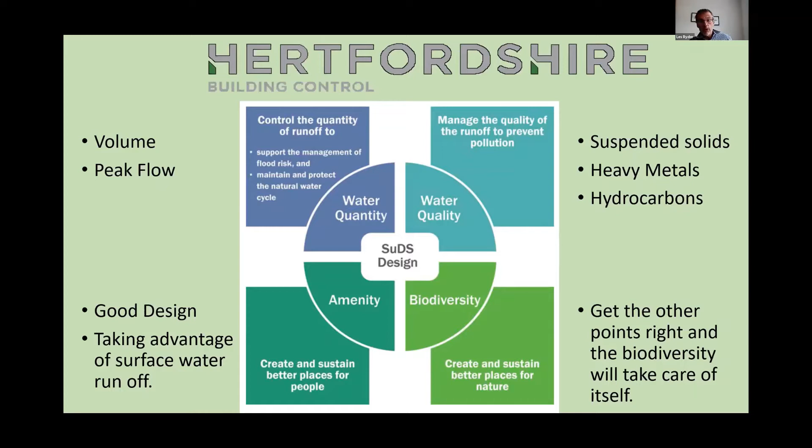What I was going to do to start off with was try and give a guidance to the legislation. And although SuDS is considered more for the big schemes, we've been adopting SuDS for a million years now. A soakaway is SuDS. It's an infiltration device, and requirement H3 of the building regulations is very clear about the way that we get rid of surface water.

It's got a hierarchy just the same as the SuDS manual does, where we look first to infiltrate, then secondly into a water course or a water body, and third into a sewer, but it doesn't identify any sewer, just says a sewer. The SuDS manual is a little bit more detailed, but it's along the same lines.

Wales has also added to that list collection for use, because infiltration can sometimes be difficult in Wales, because your site may be on bedrock, and it's very difficult to infiltrate into that. So we try and use it where we can, i.e. with rainwater harvesting. And then we have infiltration, surface water body, surface water sewer, combined sewer. So the legislation from the building regs is the same as the non-statutory guidance of the SuDS manual.

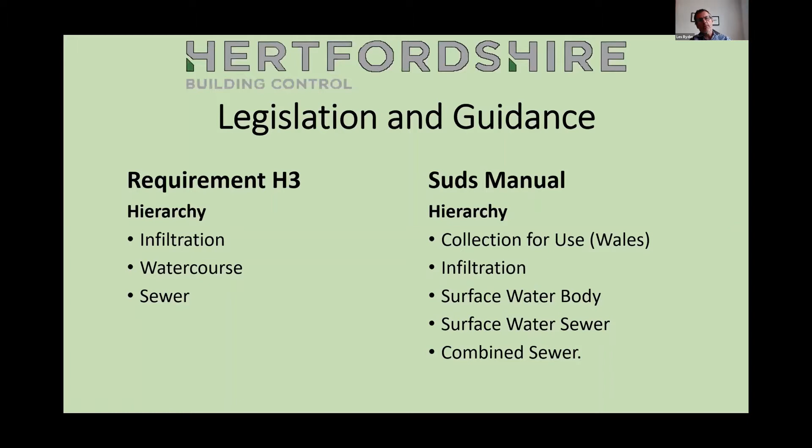So let's try and combine them together and give you guys some kind of idea of when you're going to be using soakaways and infiltration devices for the building regs, and when it's going to kick in and you're going to need to use SuDS as part of the planning process.

So up to 25 square meters of roof area, we're looking at a soakaway, and the design is 10 millimeters of rainfall in 5 minutes. So it's quite an intense event that soakaways for up to 25 square meters are recommended to be designed for. So don't be surprised if they overflow. They're almost designed to fail.

So when people turn around to me and say, well, I don't want to use the soakaway because it won't work in this soil, I say, well, they're not designed to work all the time. A 10 millimeter rainfall for 5 minutes is probably once every 6 months. So if it doesn't fail once every 6 months, it's doing extremely well.

Now, if you're between 25 square meters and 100 square meters, then you're looking for a rectangular soakaway in accordance with BRE 365, and you're looking at a 10-year return period to design it to, with a number of durations of storm events. So you're looking at an event that has a 10% chance of happening every year. So it's not as if that storm's only going to happen once in 10 years. It stands a chance of happening 10% of the time in any year. So again, it stands a chance of overflowing if it's designed onto the limit.

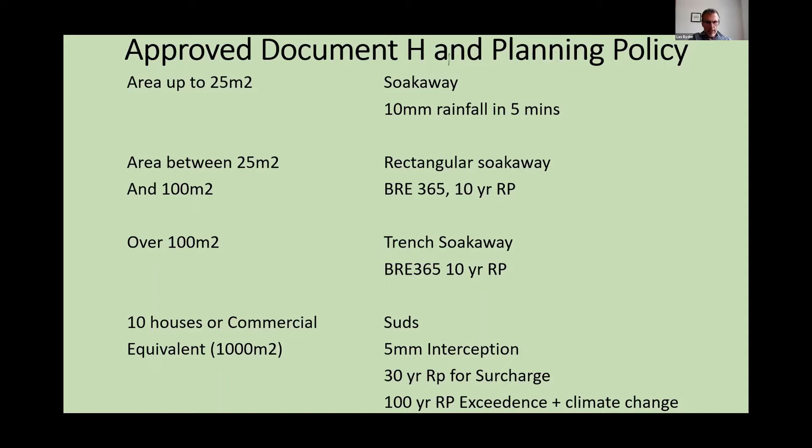And you'll see occasionally on developments curbs where curbs shouldn't be there. And the reason for that is it's directing the exceedance to where it's designed to be directed. So that's the reason for the curbs sometimes, obviously not always the case.

A little bit of a chat on soakaways. Regardless of the size, the benefits and the disadvantages are the same. It's an infiltration component, it's a storage component, and it provides some treatment in relation to quality. And it acts the same way as a big attenuation tank, exactly the same if you think about it. You can have large quantities of water coming into it, but there's only small quantities of water that's going to go out of it.

So the whole SuDS thing is based upon a soakaway, basically. Even though HR Wallingford would clip me around the ear for saying such a thing, because there's much more involved in it than that. In relation to the design, this depends upon the inflow and the subsoil. So the storage equals the inflow minus the infiltration.

So if you've got 10 litres per second coming in, and you've got 1 litre per second going out, then you've got to store 9 litres per second for the duration of the storm. It's really as simple as that. The other aspect of it: it should half empty within a reasonable period of time to deal with the next event. That makes sense. The thing fills up because it's dealing with an extreme event. If something else happens, it's going to fail almost instantly. So there's a bit of common sense involved in that.

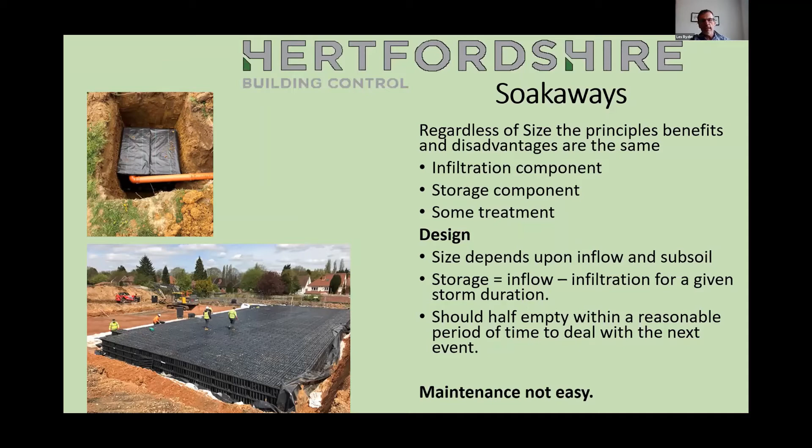This had me rolling around on the floor this morning. It was sent to me for comment. That's supposed to be a soakaway, and instead of wrapping it in geotextile membrane, they wrapped it in polythene and effectively made, I don't know, an underground pond, I suppose, because it's got no outlet. So things do go wrong occasionally, and that's basically something that went wrong.

I blacked the guy out in the photograph, so just in case anybody thought it was his fault, and I'm sure it was.

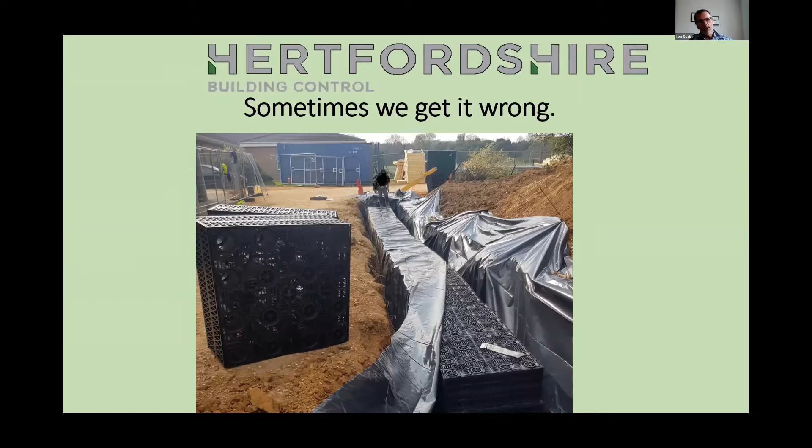Right, okay, a little bit more about soakaway design. Soakaways are designed to BRE 365. Now, all the data relating to rainfall characteristics in this country are based upon a 5-year return period storm with a 60-minute event. And that, for all of the country, is 20 millimetres. So that's 20 millimetres of rain all throughout the country. It doesn't alter.

Now, as per usual, what's happened is we're doing SuDS, and of course the rainfall characteristics are calculated completely differently. No reason for this. You either calculate soakaways in accordance with the index flood, or you calculate SuDS in accordance with the M5-60 data. But no, we've got two ways of doing it.

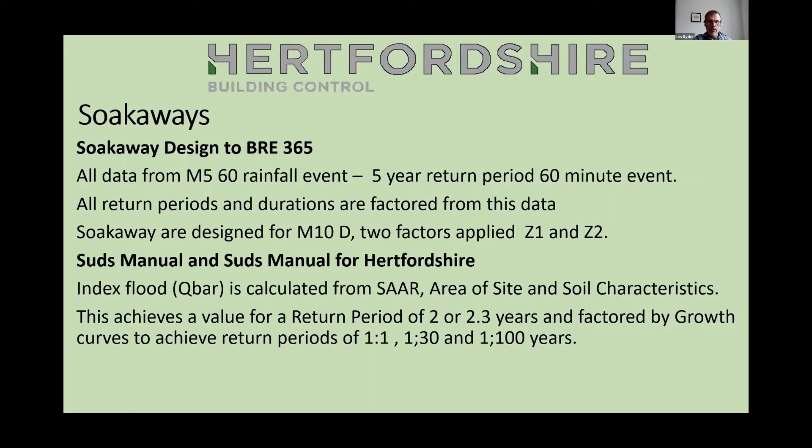What is it trying to achieve? Well, it's trying to mimic the surface water runoff of a greenfield site. And basically, how does that happen? It happens through infiltration, through both deep and shallow infiltration. Now, we've got 2 types of infiltration. They depend upon the soil. If the soil is permeable, then the infiltration can go deep, and that will recharge the water table, to potentially create the base flow for the rivers.

And the shallow infiltration is if we've got an impermeable solid geology, and basically what happens then is the water will permeate, the topsoil will be permeable to a certain extent, and then it will start heading towards the watercourse, or some kind of ponded retention because of the topography of the area.

The other way the greenfield site will lose water is through evaporation, either direct to the atmosphere or through vegetation, which is transpiration. Now, the SuDS people have invented a new word called evapotranspiration, and I won't even write it down.

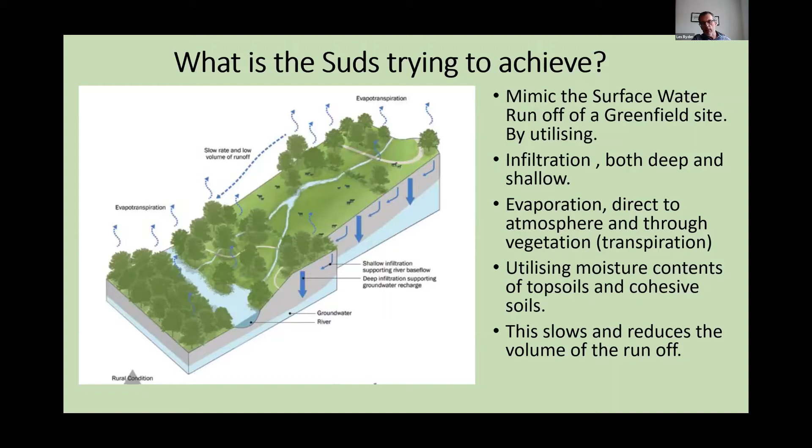So what are the factors that vary the runoff? Like I said, the degree of vegetation, depth of the topsoil, type of the subsoil, and of course the rainfall characteristics. If it doesn't rain, we don't have any runoff. It really is as simple as that. But we don't have that facility in the country, as you're probably well aware.

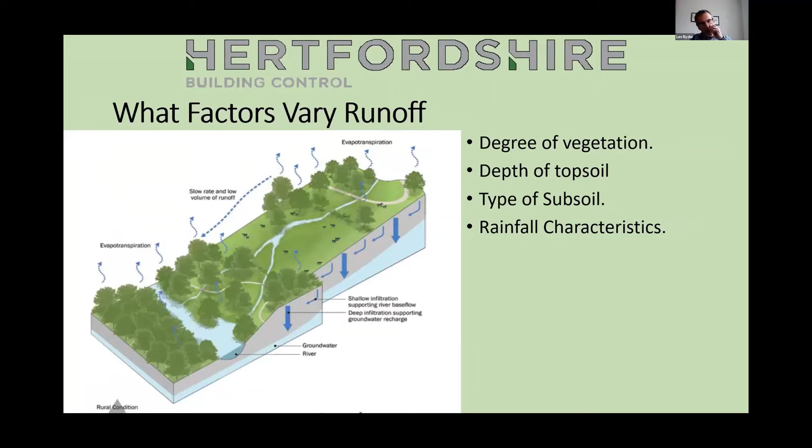So here we come onto the developed side, which is causing us all the problems. Well, it's not causing us all the problems, because some of the flooding problems are natural floodplains, but a lot of the flooding problems are created by development. So what's the problem? The problem is we have minimal infiltration, because we're covering the site with as many buildings as the planning department will allow, because that's the nature of development. We don't have that much greenery. We'll have the token tree and the token bit of grass to get the development through planning permission. So the transpiration is minimal.

Evaporation still occurs because evaporation will still occur off a hard surface. And basically what the above does, it increases the volume and the speed of the runoff to the receiving water or the outfall. And that's a major issue. The major issue for the lack of infiltration is it'll diminish the water table, so the groundwater will be diminished. That could affect base flows in rivers. The pollutants are instantly washed off, so they end up in the receiving waters as well. So basically slow runoff and low volume is good, greenfield. Fast runoff and high volume is bad, that's developed.

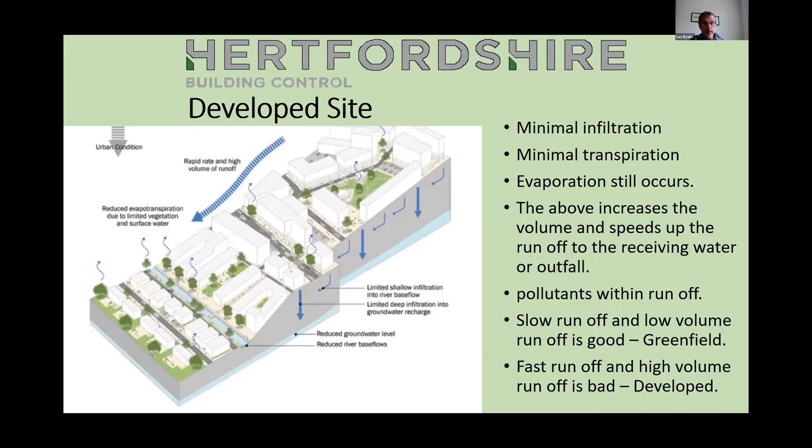So consequences of the development. It increases the downstream flood risk. That's what I was saying about volume. The increased volume tends to create local floods, like in the photograph in the introduction, people wandering around specific areas in 300 millimeters of water. If the pipe capacity for the conveyance of the water is limited, any extreme events will cause local flooding. So peak flow events tend to cause local flooding. They're the ones that pop the manhole covers off and stuff like that.

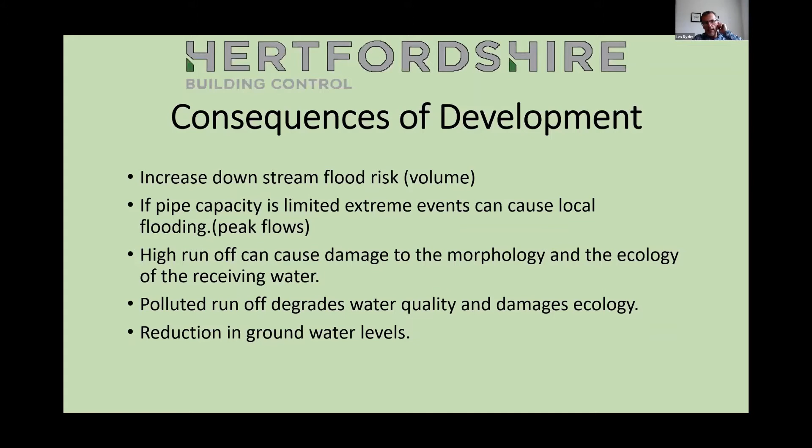So high runoff can cause damage to the morphology and the ecology of the receiving water, which makes sense. If the river's meandering and all of a sudden it's moving a lot faster with bigger volume, the erosion starts increasing, and the local ecology, which might be used to slow moving waters, is now exposed to fast moving waters. Polluted runoff, which happens in the high frequency event, also damages the ecology. And of course, what I've already said is there's a reduction in the groundwater levels as well.

Right, I'm going to introduce you to interception. Interception is key to this, and this is the reason for interception. If you look, apparently this is a year. This really made me laugh. Actually, he said, "Oh well, this data was being collected from one particular place in a year."

Now, if you don't like rain, wherever this is, don't go there. Just like if you don't want to get murdered, don't go to Midsomer, right?

So if you don't want to experience lots of rain, because apparently this is a place, and if you look at the number of events, we've got 12,000 events there, 12,000 rainfall events. Now, apparently 70% of them were all under 5 millimeters. And so the philosophy is if we can deal with 5 millimeters of rainfall, then instantly we've dealt with 70% of the problem. And these obviously are the typical British small frequent events.

And the small frequent events are also a major contributor to pollution in receiving waters, because the dilution of the pollutant is low. So we want to get rid of this for two reasons. It will solve a lot of volume issues in receiving waters, and it will also solve a lot of pollution finding its way into the receiving waters too.

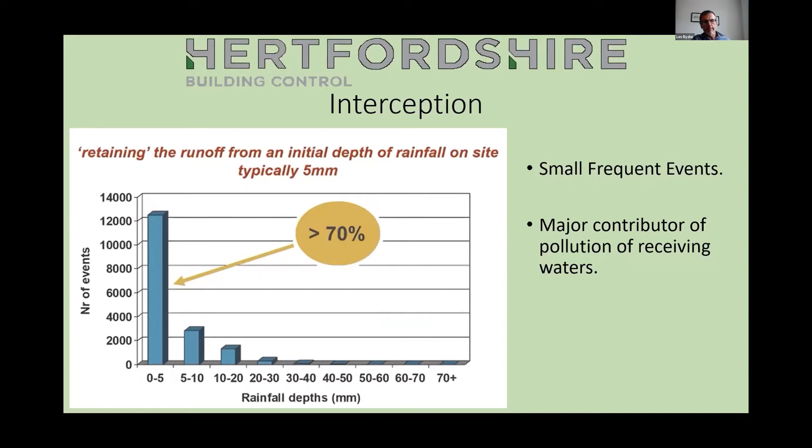Just a quick map in SuDS, the average rainfall. And if you look at the right-hand map, if it's blue, it's high. If it's green, it's low. So for the love of God, don't move to the west coast of this country because you're going to get wet. Really, it's as simple as that. But what's interesting about this is, on the right-hand side, that's the average rainfall. So the red is high and the black is low.

And what's interesting about this is that if you live in an area where the volume of rainfall over a year is high, you're unlikely to have high intense events. So you're going to have one or the other. So what the red is there is the very high values of rainfall over a 100-year return period and a 6-hour rainfall. So these are huge amounts of rainfall.

On the left-hand side it tends to be somewhere between 1 meter and 1,200 millimeters of rainfall. On the right-hand side, it's somewhere between 500 and 800. But on the right-hand side, you're more likely to experience a flash flood. High intensity, low duration event, and this will affect how you actually design your SuDS or your soakaway. This is all taken into account on the numbers.

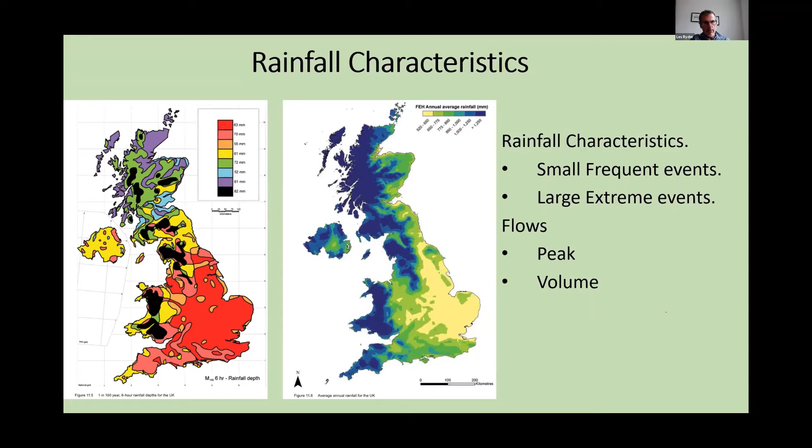This is a hydrograph, and this identifies a typical rainfall event. In the blue is a typical rainfall event in a development. No SuDS. So that's the start of the event. It starts to rain almost instantly. We have runoff, and it'll reach a peak relatively quickly. As a general rule, whatever the duration of the storm, if it's a 30-minute storm, then peak intensity is generally halfway, 15 minutes into the storm. That's where you'll get your peak. So it's more or less reflecting how the rainfall actually drops from the sky.

The red is how we've been dealing with that. So if we now say, right, okay, we'll put a big storage device before the receiving waters, an attenuation tank, and we'll stick a hydro brake on it, a flow control device, which may limit the flow to 2 litres per second or whatever the local flood authority agrees. And that's the hydrograph you're going to get there. Again, the response is going to be absolutely instant.

It'll go up to a relatively low peak, but it'll maintain that peak. And that peak is whatever you set your hydro brake at. So if your hydro brake's set at 5 litres per second, that peak is 5 litres per second. And of course, that goes on for quite a long time. And what's consistent is the area under the curve, which represents the volume of the rainfall event, in both cases is identical. The difference is it just discharges for a longer period of time.

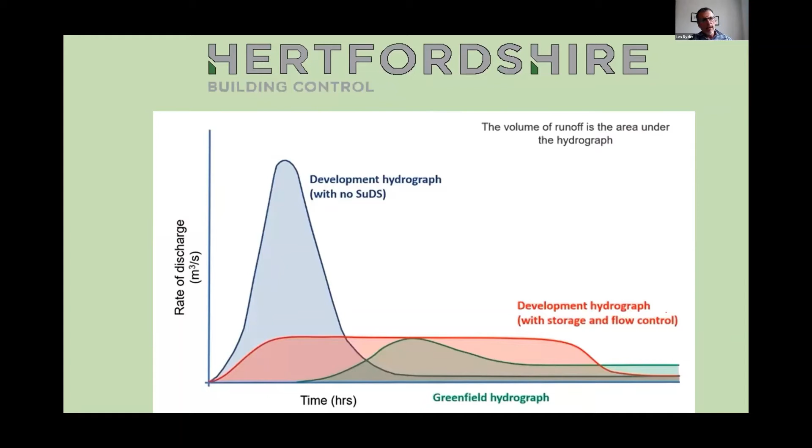The red is how we've been dealing with it. We're basically not putting many SuDS or infiltration devices into the design. Basically what's happened is you've got a development, lots of hard standings, one huge tank with a small hole at the end where the water comes out. It really is as simple as that. So like I'm saying, we really need to get closer to this green line where we don't have any runoff for the start of the event.

Now that's called interception. So this isn't absolutely accurate, but it's close enough for the purpose of this presentation. Interception is generally where the rainwater does not eventually discharge into the receiving waters. So that's either going to be through evaporation, transpiration, shallow or deep infiltration. Deep infiltration is technically not interception, but it doesn't get into the above ground receiving water, which is good.

When the rainfall exceeds the above, i.e. the 5 millimeters, which is what we're trying to achieve, then runoff's going to occur, but it's going to be slowed by the vegetation and the uneven surfaces within a greenfield environment. Obviously, within a developed environment, it'll just flow off those surfaces. And like I said, therefore, if you adopt these principles, only a percentage of the rainfall turns into runoff, and that's the case in greenfield.

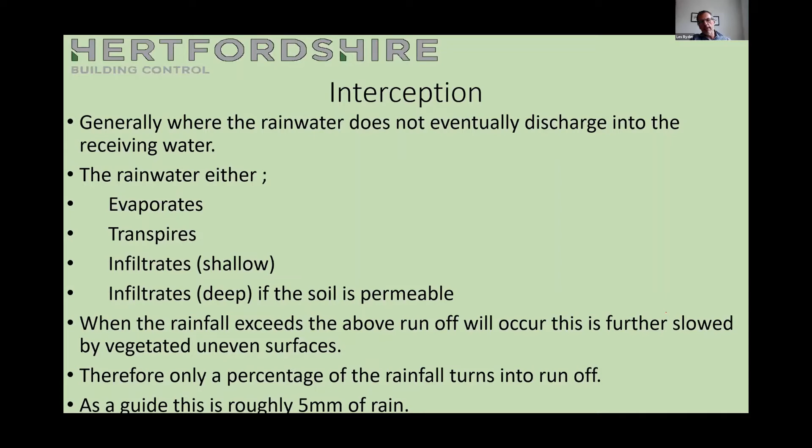So as a guide, this is roughly 5 millimeters of rain. The idea is that on developed sites, we try and infiltrate that 5 millimeters of rain so it never ever finds its way into the receiving waters or the sewer or whatever. Now, you can't always infiltrate. So here's a few points. BRE 365 is when the water table can extend to the underside of the soakaway, then you shouldn't really have a soakaway, or your soakaway is too deep. You have it a bit narrower, a bit shallower.

SuDS, when the water table is within 1 meter of the underside of the infiltration component. Now, that's more for quality than quantity, because what you're looking for between the underside of the infiltration device, because it may not be a soakaway, and the water table is unsaturated soil, because that will filter out some of the pollutants. So that's the purpose of that. Now, I always thought it was 2 meters, but I looked through the SuDS manual this morning and it was actually 1 meter.

Regardless of the standard, where there's a risk of dissolution of soft bedrock, which is the mechanism of sinkholes, we've got a few of them around Welwyn Garden City, typical of soft limestones, chalk, and it's basically where the acid rain will start reacting with limestone and chalk and the calcium. I think it's calcium sulfate? Don't quote me on this. Calcium carbonate, that's what it is, I'm sure. But that's basically how the dissolution starts happening, and it starts creating holes in the soft bedrock, whether it's chalk or the soft limestone, and there's a possibility then of subsidence.

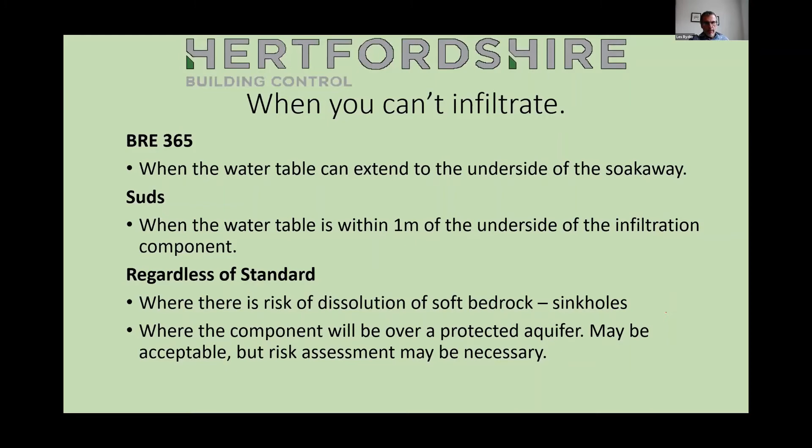Right, so we're going to move on to some green roof components. So how are we going to achieve all of that malarkey that I've just gone through in the last 16 slides?

And everything's turned blank that was supposed to be checking my time. I'm not doing too bad, Trev, am I? On timing? You're muted, but I saw the thumbs up.

Okay, well, the green roof. Obviously we don't see many green roofs because, can you imagine green roofs on domestic, just popping up to mow the roof, dear. So you don't tend to see many green roofs on residential properties, but there's quite a few on commercial ones, and it's brilliant for interception, because you will lose 5 millimeters of rain in that green roof relatively easily.

So what does it do? It reduces the peak flow, so it's going to reduce the local floods. It reduces the volume, so it's going to reduce the more regional floods. It's going to provide treatment, so you're going to get an element of treatment before it seeps through into the disposal system. Encourages biodiversity, as you can see, and it could provide amenity. There's a bit of a footpath around there. It would be good if there was a park bench where you could eat your sandwiches; that would provide even better amenity. But it's a pretty good SuDS component.

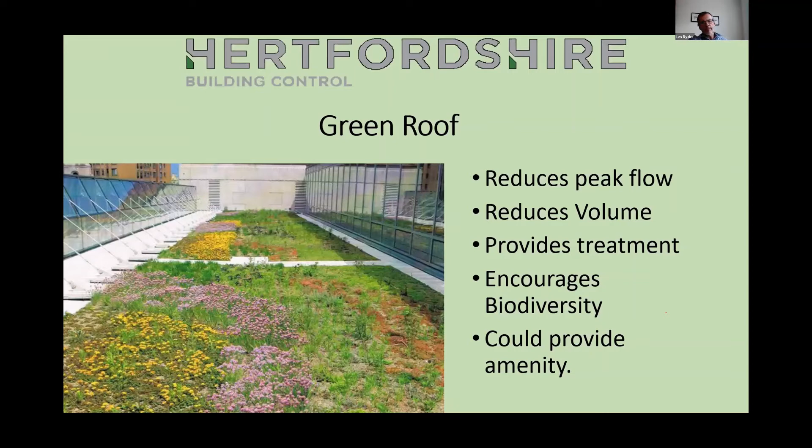Rainwater harvesting, which is mandatory in Wales, and I think it'll be only a matter of time before it becomes mandatory on the largest schemes here as well. It reduces volume, doesn't treat anything. Obviously, there'll be some treatment between the runoff of the roof and actually finding its way into your toilets, otherwise it's going to stain all of your toilets. No biodiversity, and not really much of an amenity.

But the diagram made me giggle, I must admit. Me and Trev had a good laugh at it yesterday, where they put the collection, and so the tank's on the first floor, and that's great, because normally, as everybody who's done anything relating to this knows, the tank's generally in the ground and then is pumped back up into the water storage tank, and I love a bit of services, but I don't like pumps where you don't need them.

So it'd be great if we could actually get this rainwater from the gutters into the tank, and it would work really well with monopitched roofs. If the fascia is at a high level, then it's going to work. We'll be able to get that rainwater harvesting into tanks in the roof, and then that will obviously provide a good head of water for all of your devices.

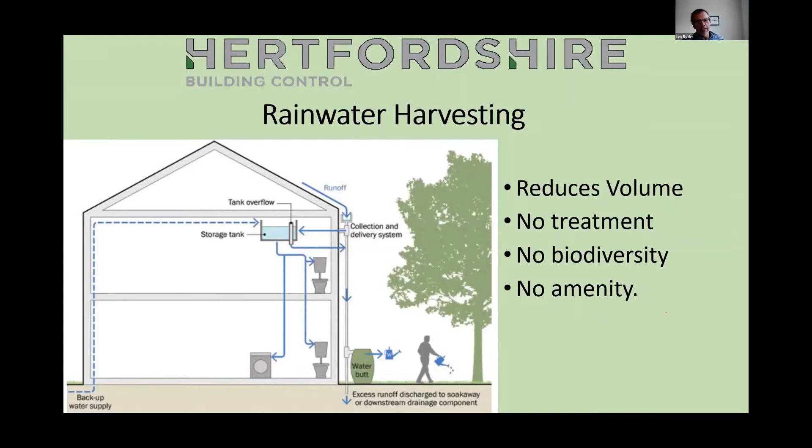Permeable paving. Oh God, I haven't changed that slide, Trev. I've got a comma in there after Will. Obviously thinking about Will Jones, one of our surveyors, but it says it will convey water.

So it will convey water, because sometimes if the sub base is impermeable, you would have to drain the sub base. But if the subsoil is permeable, obviously that would permeate into the subsoil. So great, it reduces peak flow. So straight away we've got a bonus there. It may reduce volume if it's used as an infiltration device. It's certainly going to reduce volume, and it's also going to provide treatment. We've got a couple of layers of geotextile membrane in there, which is going to hopefully filter out any hydrocarbons or heavy metals that might have been dumped on the paving.

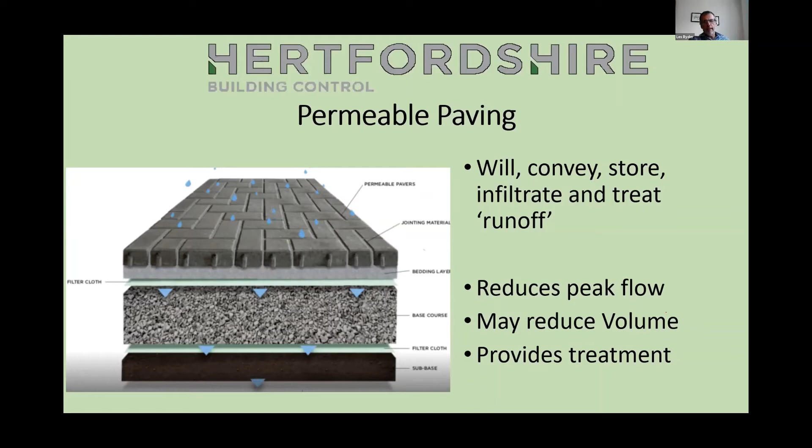My favourite. I love a swale, and Elvetham Heath in Fleet is full of them, where I did probably 5 or 6 years on contract in that particular area. Primarily to convey water. So basically, just looking at that, that probably replaces a 225 surface water drain, probably at 1 in 40 or something like that. Probably convey the same amount of water. Well, it's going to convey more, but the difference is that the pipe will convey it faster.

And here's the difference between swales and pipes. Swales, we want the water to move slow, because it'll drop the sediment out. That'll drop all the heavy solids out. And then matey comes along with a shovel and digs it out once a year. Now, pipes, you need self-cleansing velocity in the pipe, which is generally 1 meter per second minimum. So the conveyancing in the pipe is going to be fast. And that contributes to what I was saying about fast runoff times between the receiving component, the roof, and the receiving water.

So basically what we're trying to do is slow the whole process down. So that's how it reduces the peak flow, reduces the volume, provides treatment. It's constantly running through vegetation all the time, because these things should be running dry. They should be dry most of the year. So the trick is, if you're living in a development and the swale's wet most of the year, there's a problem somewhere, and obviously it's upstream. Downstream rather.

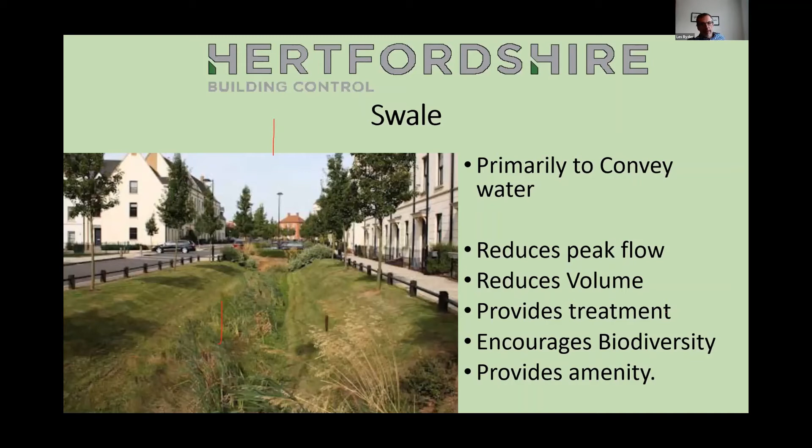Filter of the French drain. You'd be glad to know that the French didn't invent the French drain. It was invented by an American, which I'm really glad about, because I was really upset when in the

HVAC world, newtons per meter squared, the measurement of pressure, was replaced by pascals. So I wasn't happy about that. Everybody talks about pascals now in pressure terms, and I thought, well, that's fair enough. The filter drains replaced the French drain. It's a fair swap. But apparently the French drain wasn't French; it was American.

Primarily to convey water. Reduces peak flow, minor, possibly. It's going to reduce peak flow if there's a lot of infiltration, and again, it'll reduce volume if there's a lot of infiltration. And of course, it does provide some treatment. By the time that water gets to the receiving or the final outfall, it'll have a degree of treatment. It may have deposited some of the hydrocarbons and heavy metals into the granular surround to the French drain.

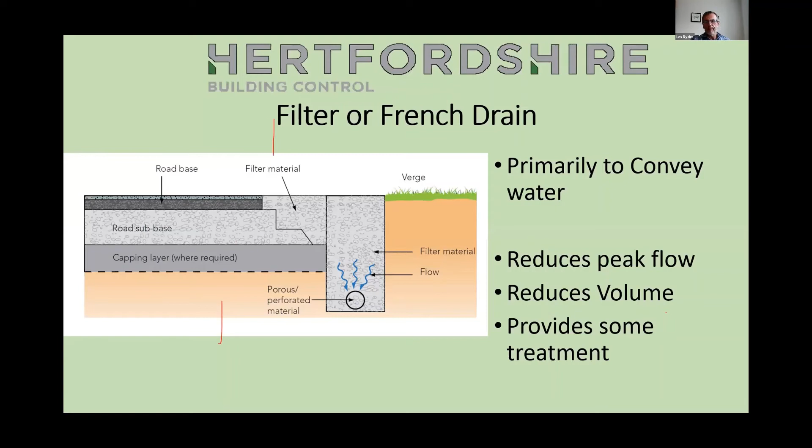22. Bioretention. Obviously, we see these all the time in car parks. So obviously it's got a nice amenity value. It looks a lot nicer than the flat car park that goes on for a couple of 100 meters. Reduces the peak flow because you may get a bit of infiltration with it. Reduce the volume. Again, you may get a bit of infiltration with it, depending upon the subsoil.

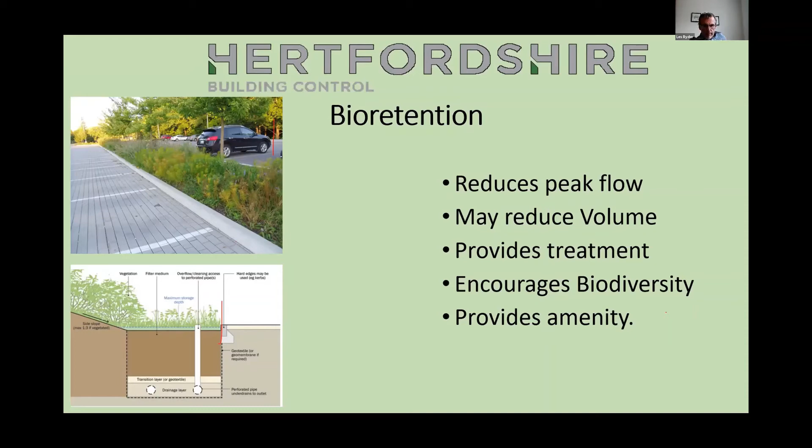If you look at the diagram, sometimes underneath the bioretention filter material, the growing medium, so to speak, there'll be a drainage system that will eventually discharge into perhaps a swale or some other receiving body. Encourages biodiversity, and like I said, it provides amenity. It's nice to look at. It breaks up those boring car parks.

Detention basin. Oh God, I would have loved one of these as a kid. I would never have been out of it. Primarily to store water, long-term storage generally. Should be dry most of the year. If it's wet, there's a problem somewhere. Obviously reduces peak flow, reduces the volume, certainly provides treatment as that water's running into there.

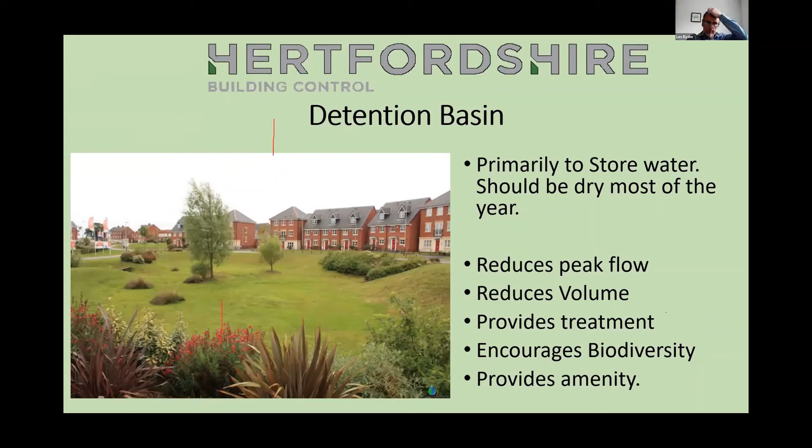Attenuation tank. Oh, we've seen all of these, haven't we? We've seen lots of these. It's almost the go-to. Only stores water, and of course it reduces the peak flow because the outlet's going to have a hydro brake on it, or another flow control device. But to be fair, all the other flow control devices are prone to bung up, so the hydro brake certainly is the go-to piece of kit.

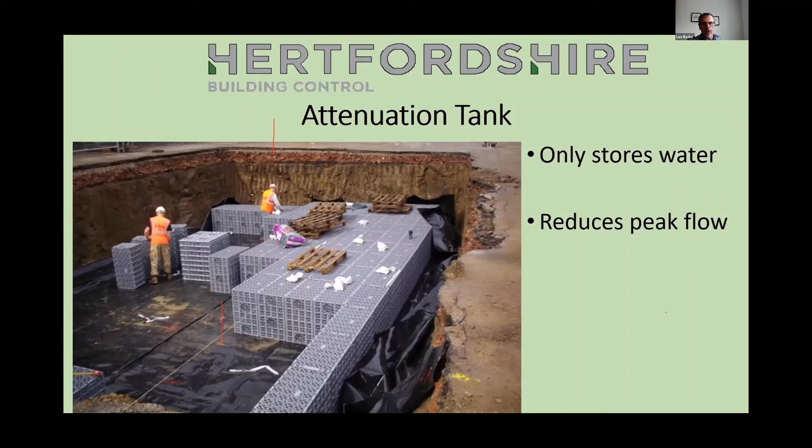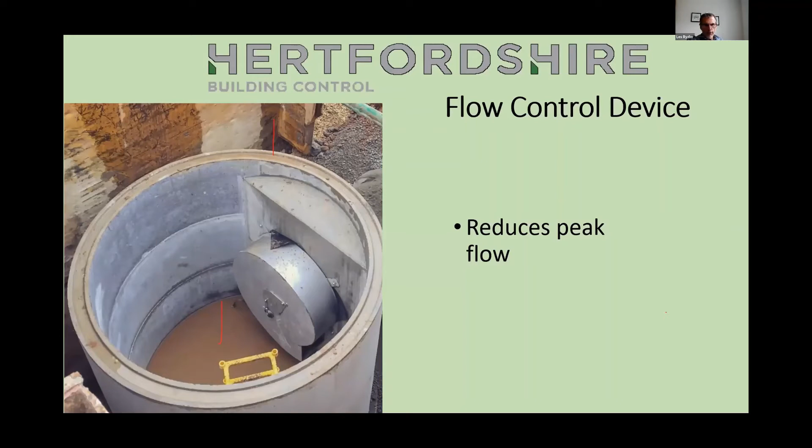And speak of the devil, there it is, the hydro brake. So you can set that to any discharge that you want, whatever you've agreed with the water authority or the Environment Agency, depending upon where you're discharging your water and what's your final outfall. It's the first photograph I've actually seen of a hydro brake.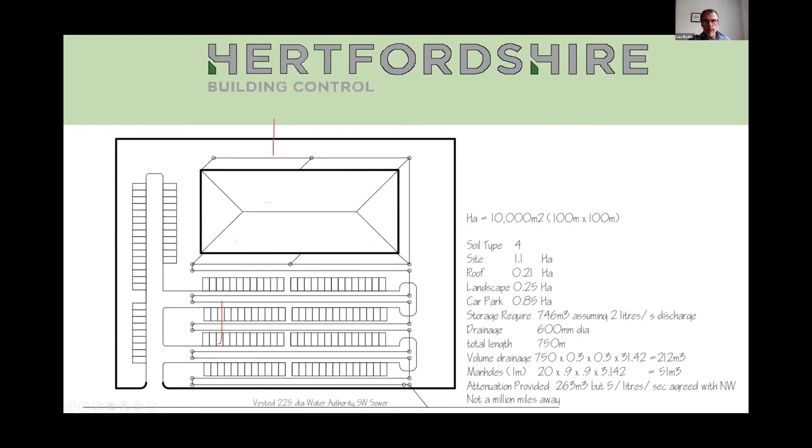What would have happened if we'd done it the modern way? So if we'd done it the modern way, what could we achieve? Well, we've already figured out that the storage requirement would have been 750 cubic meters, assuming 2 liters a second discharge. But if we stuck rainwater harvesting in, then I managed to knock 100 cubic meters of storage off for that. And remember, this is discharging at 2 liters per second, not 5.

And then when I put permeable paving in there, I managed to drop it down to 383 cubic meters, and the soil type is 4, which means it's a heavy clay. If that had been a soil type 2, a kind of a clay sand, so to speak, then this would have dropped down to probably 100 cubic meters or so. So even in modern standards, we could get that area down to about 400 cubic meters of attenuation, which is still big. We could still probably stick a few more SuDS components in there just to solve that.

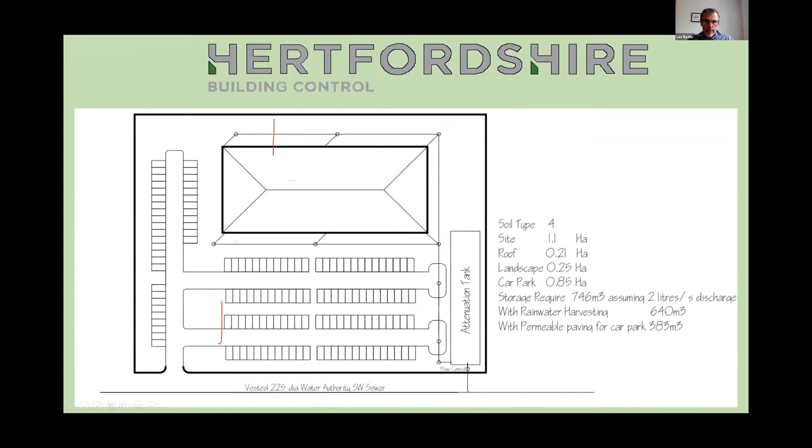Diddly, where's my? I'm getting close to the.

And here we go, small domestic extensions. So I've got a small domestic extension. I'm looking at that on the left-hand side, and we've got a surface water sewer, and I've got 3 manholes around an existing building, and we put an extension out the back with a little bit of a patio and stuff. And because it's got a surface water drain, people will want to discharge straight into the surface water drain. Well, remember, the hierarchy is infiltration first.

So even though that's a surface water drain, I've said surface water or combined, that's not the way to go. The way to go is initially through a soakaway, and it's under 25 square meters. So a cubic meter soakaway, you will have to try hard to design one and make it fail, because we only design it for 10 millimeters of rainfall in 5 minutes. So if it's a clay subsoil, then we need crates, and if it's a granular subsoil, then you'll get away with rubble.

And then we can go a little bit flash for the last one. Stick a rainwater butt in there if the guy likes a bit of gardening and stuff. But what would be really good on the rainwater butts is that if you're not a keen gardener, like I'm not a keen gardener, it would be great to have like a 5 millimeter hole in there at discharge, with a filter on it to make sure it didn't bung up. And then after a high intensity event, that would just slowly trickle into what I've called, it's like a flower bed, so to speak, a bioretention unit there.

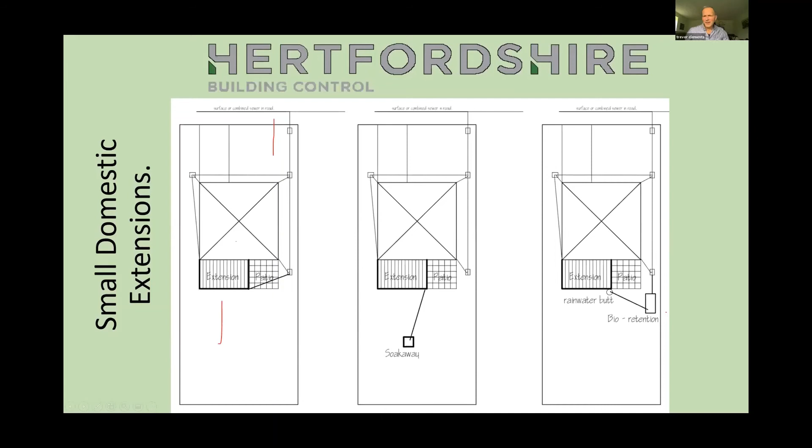I've got perfection. Oh, Les, I was about to commend you for perfect timing, but you're just running over. So mate, let's be quick. I never started till 35. I've got 4 minutes. I'll only take a couple of minutes.

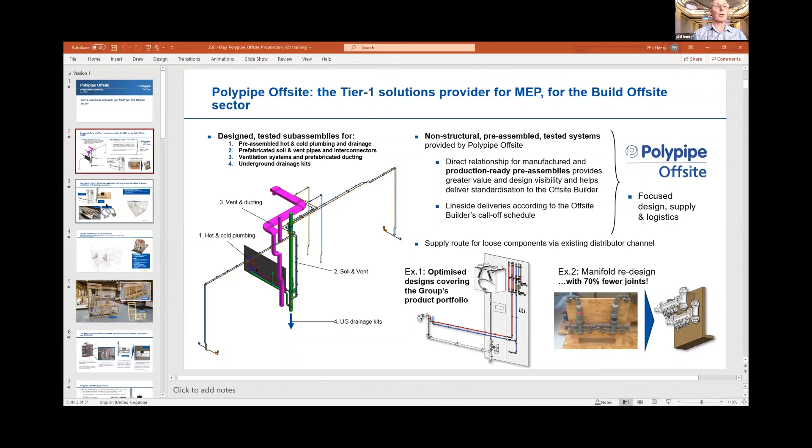So effectively we'd look at the BIM model. We'd take out the MEP, as you can see there from the digital twin. That's why it's absolutely key. And these are being developed in factory settings for panelized or volumetric houses. And we're looking at productivity, so reduction in installation time, self-contained frames, fit first time effectively.

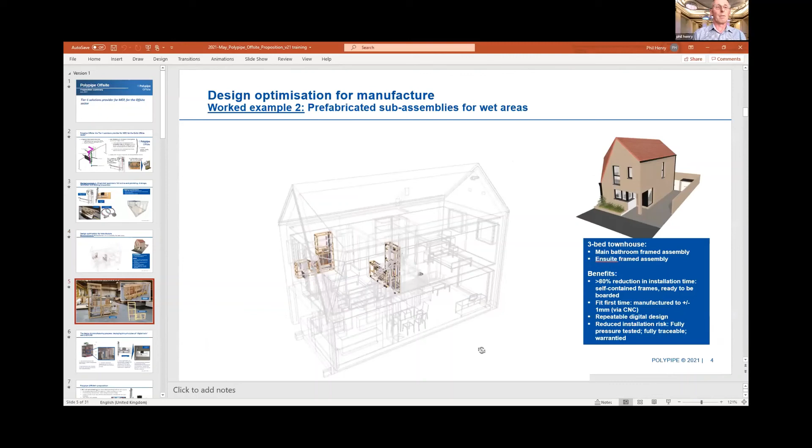And we're trying to use these with things like color-coded pipework as well, which I can show you on this image. So this is a timber frame, where you can see everything is fabricated. The pipework is red and blue for hot and cold. The soil pipes are all connected, the WC, the connections for the hand basin and the cistern.

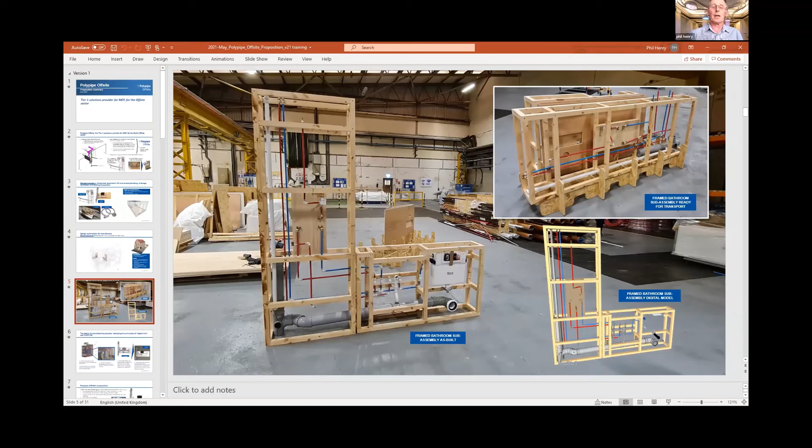And on the right was a digital twin we built the left from, and that's via projection onto the factory floor, so that it can be made from that twin into a prefabricated item. That would then be sent to site and incorporated within the factory for both the modular or the volumetric. And again, the use of that digital twin and CAD/CAM is absolutely imperative, starting with BIM level 2 to start this process.

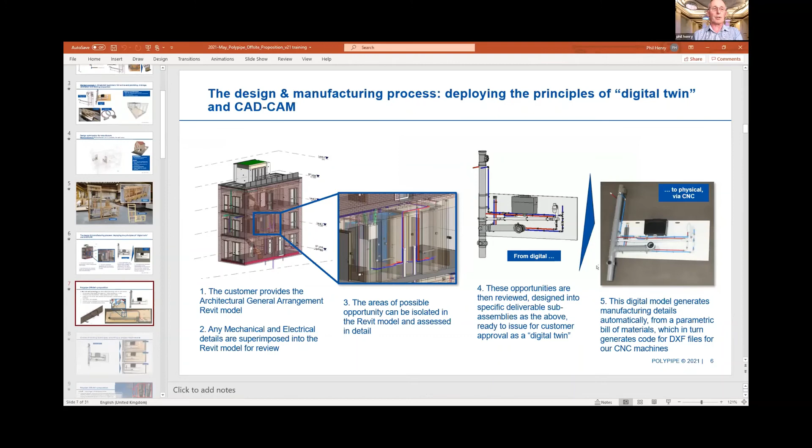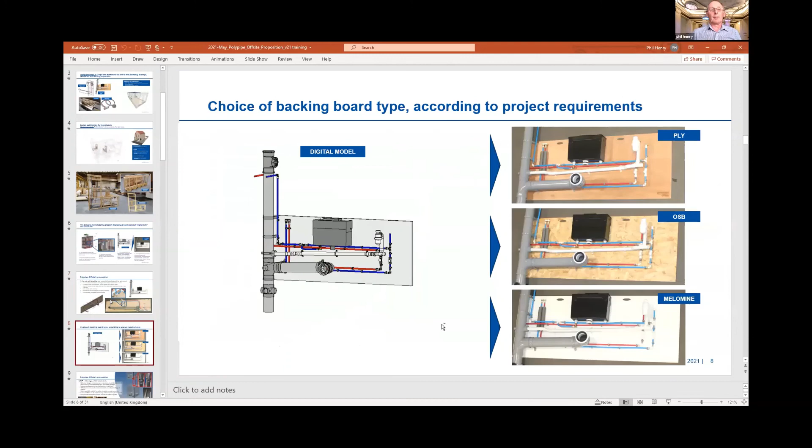As you can see, another example of putting these MEP boards together within the factory. And finally, this one is dealing with complicated areas where we're looking at delivering the systems for high-rise houses, terrace units, but also supplying them as a prefabricated item, very similar to the car factory principle. So hopefully that's given a little bit of insight into what's going on in terms of delivering MEP within the modular world.

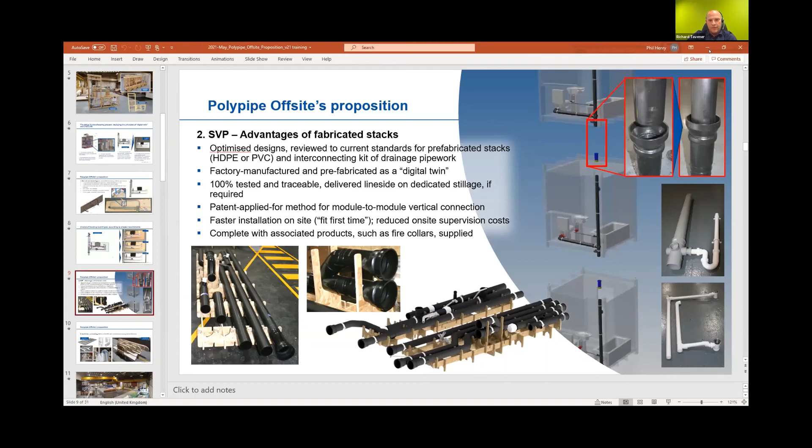Excellent. Thank you, Phil. Nice. Now, if you can unshare your screen. Yeah. You go to the top. I think there's a... That's it. Yeah. And I can then share my one. Let's go up a bit.